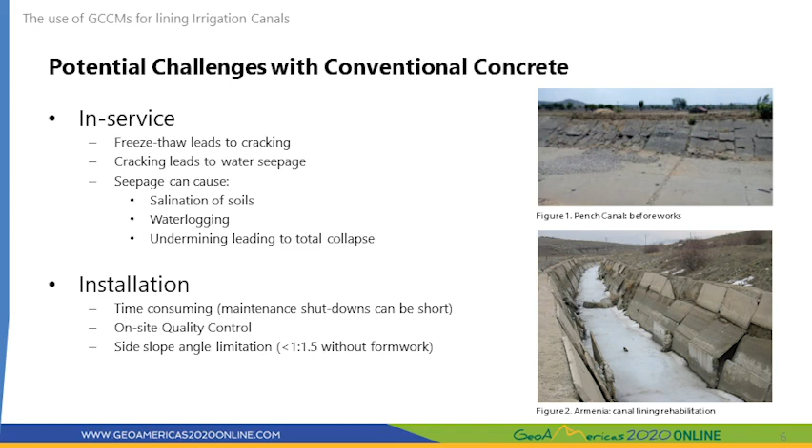And finally, the nature of pouring concrete means that side slope angles are limited. Typically, slopes above 1 to 1.5 gradient require formwork, and this leads to additional installation time and cost.

So why is concrete still used for this application? As Giroud and Plusquellec point out, concrete linings remain the preferred method of lining canals because engineers and agencies are familiar with concrete linings. And for all its drawbacks, concrete does have its benefit. It's hard, it's durable, it's UV resistant, it can be easily maintained, it can be trafficked by cattle, and it's less prone to local theft or vandalism.

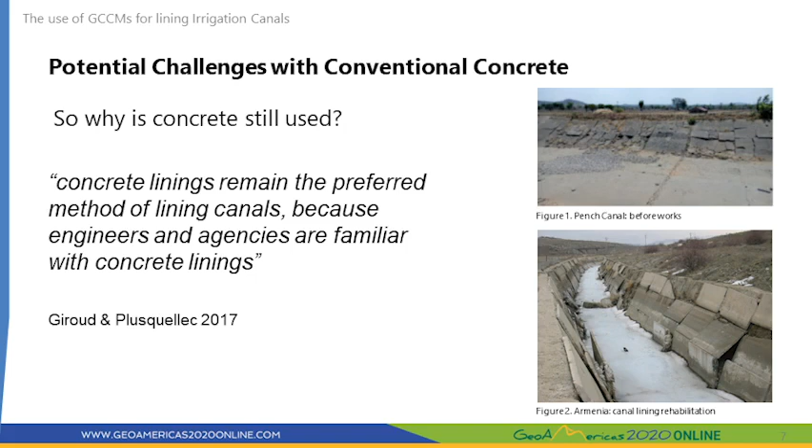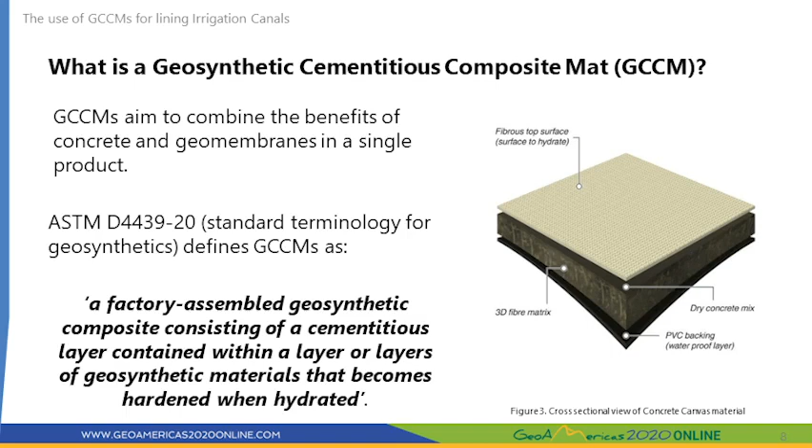So how do we combine the benefits of concrete with the speed and ease of installation of a geosynthetic product? That is the aim of this new class of geosynthetics. Defined within ASTM D4439, the GCCM is a factory-assembled geosynthetic composite consisting of a cementitious layer contained within a layer or layers of geosynthetic materials that becomes hardened when hydrated.

The most common GCCM is called concrete canvas, and it consists of a fibrous polyester top surface overlaying a reinforced fibre matrix embedded within a high early strength dry concrete mix with a water impermeable PVC coating on the rear surface.

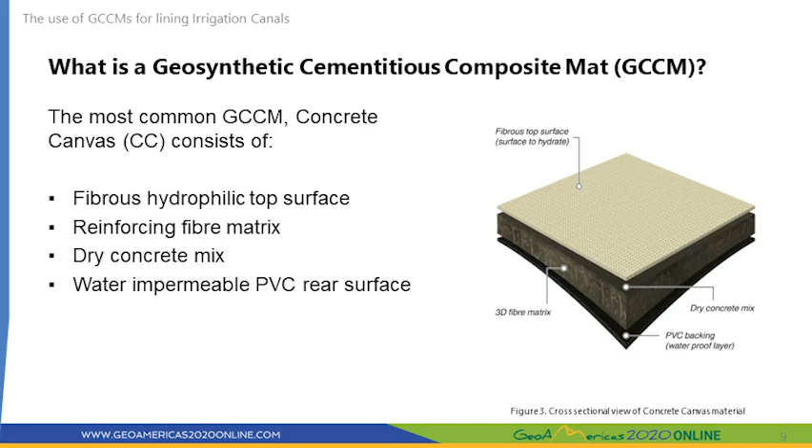GCCMs are supplied in roll format and they're laid over the soil structure that they're designed to protect. Once in place, fixed and jointed, they can then be hydrated, typically by spraying with water. The concrete then sets hard and typically is ready to use within 24 hours, providing a water-impermeable membrane overlain with a protective fibre-reinforced concrete covering.

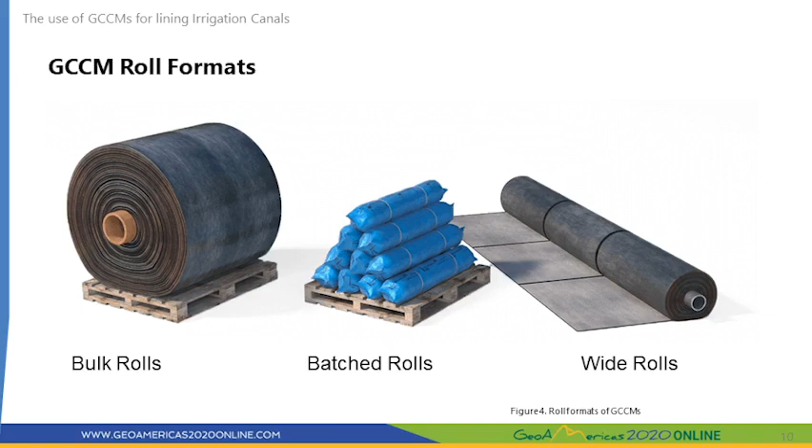Roll formats vary from bulk rolls, which are typically 1 metre wide and up to 200 metres long, to man-portable rolls, to wide rolls, which come in a multiple of the standard roll width. Typical applications include lining water channels, protecting slopes from erosion, lining culverts, and resurfacing old concrete structures such as channels or lining reservoirs.

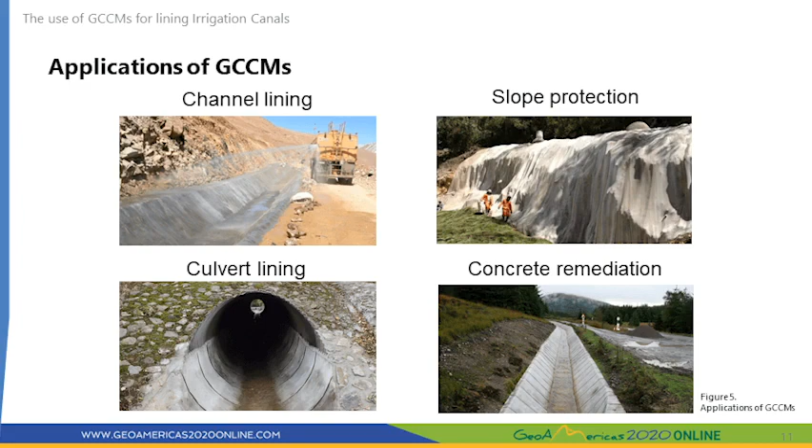One of the key properties of GCCMs is their ability to accommodate high levels of ground deformation while continuing to provide impermeability and effective erosion control. This is due to the composite nature of the product, where the fibre reinforcement initiates microcracking within the concrete. This allows relatively high strains to be achieved with minimal cracking within the concrete itself.

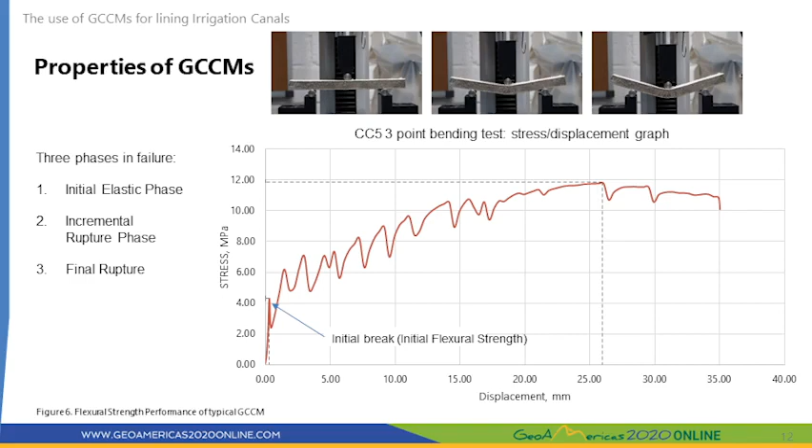I'd now like to move on and look at a real-world application of canal lining using GCCMs in the La Serena region of Chile. This is a project over two phases, with the first phase starting in 2016, which, based on its success, led to a second phase completed at the start of 2018.

So what was the problem? Well, the existing Bella Vista Canal was cut into soil and rock, as you can see on the right-hand photo, and unsurprisingly was suffering from high levels of water loss, reducing the water supply available to the local community. There were 5 sections of canal identified for improvement, all in difficult to access locations.

Another key challenge on this project was that they could only cut off the water supply for a period of 8 days at a time, and this was only possible over a short period during the winter months. Otherwise, there was a risk of damaging the water supply and crop failure to the local community.

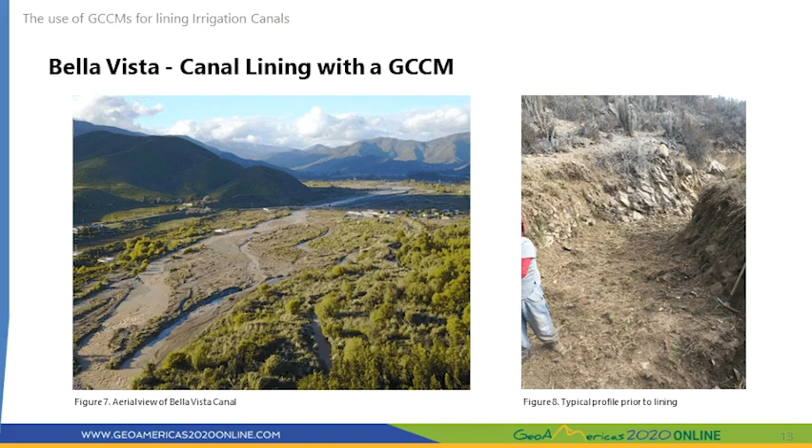The solution selected was a 5mm GCCM manufactured by Concrete Canvas called CC5. The selection was based on the speed of installation compared to conventional concrete linings and the ability for it to be transported to sites where access was limited. It was also felt that it was more durable and there was lower risk of theft and vandalism compared to geomembrane solutions.

You can see from the photo here that it was applied in man-portable rolls, cut down in lengths to suit the dimensions of the profile.

This first phase of the project was completed in only 5 days by a team of 6 people, covering 600 square meters. This included the ground preparation, which involved substantial reprofiling of the canal, as well as the laying of material.

Based on the success of this first phase, it was then decided to go ahead with a much more substantial second phase, covering a further 2.4 kilometers. You can see just before I move on the images before and after installation.

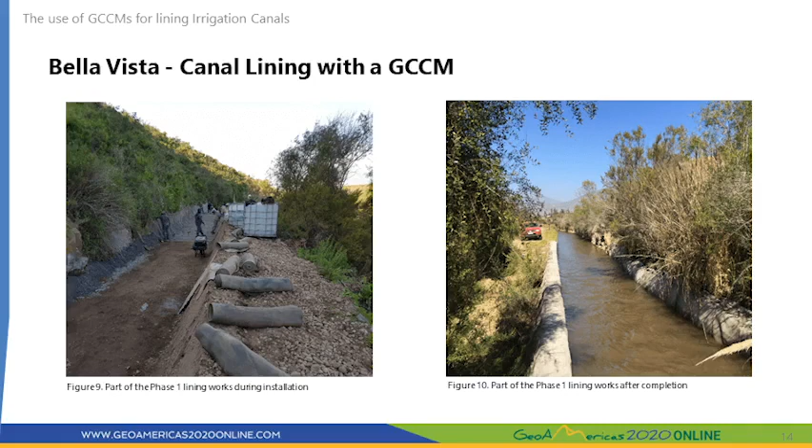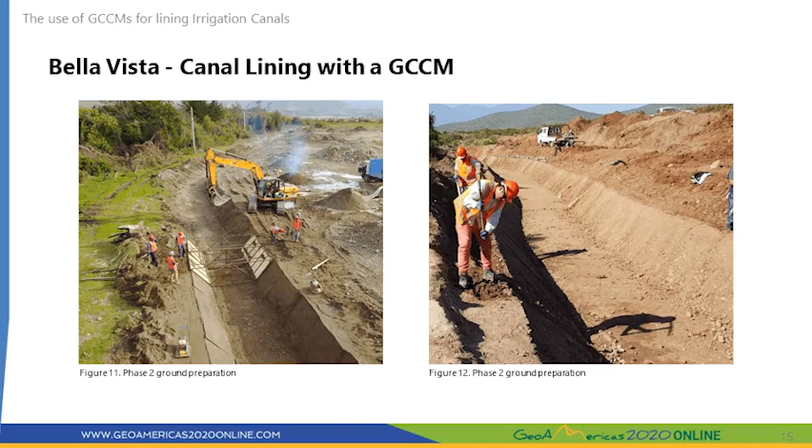For this second phase, a more uniformly graded profile was required, and so a new method of ground preparation was used. This involved using a trapezoidal former to create a precise channel profile, and by compacting stabilized material behind the former, this allowed the canal fall and the profile to be precisely controlled.

This profile was then overlain with the CC5 GCCM material, laid transversely across the channel. On this second phase of the project, access was better, so the material was delivered to site in bulk rolls. These were loaded onto spreader beams and deployed by hanging the spreader beam from the available excavators on site.

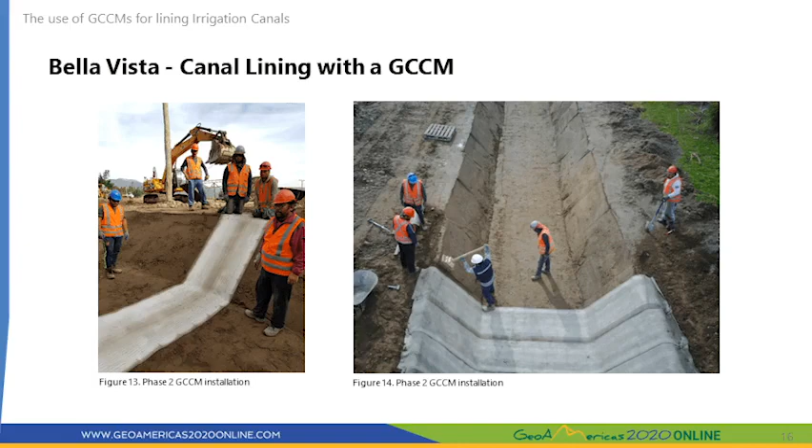Once laid, the edges of the GCCM were fixed into anchor trenches using ground pegs, and subsequent layers of GCCM were overlapped by 100 millimeters, shingled in the direction of water flow, with joints secured using screws and a polyurethane sealant. Where the GCCM interfaced with existing infrastructure, such as head walls, the material was secured using concrete screws and anchor bolts, and where necessary, sealed with an adhesive sealant to reduce ingress.

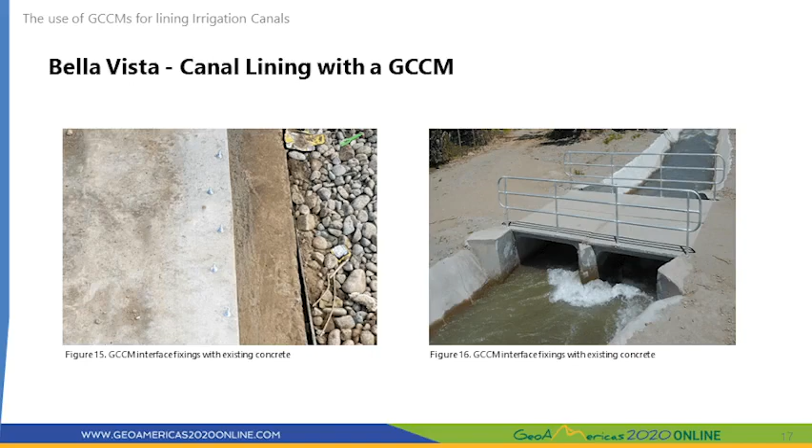I'd now like to show you a short video which I think demonstrates the application process much more effectively than just the images.

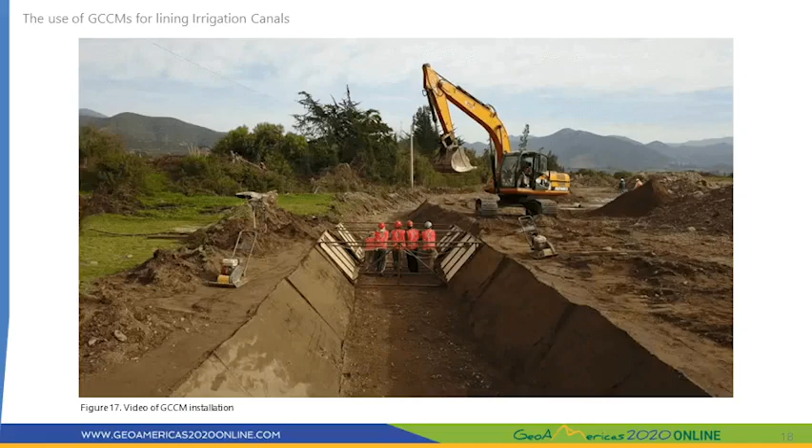You can see here the trapezoidal formwork being moved along and the GCCM material being unrolled transversely into the channels.

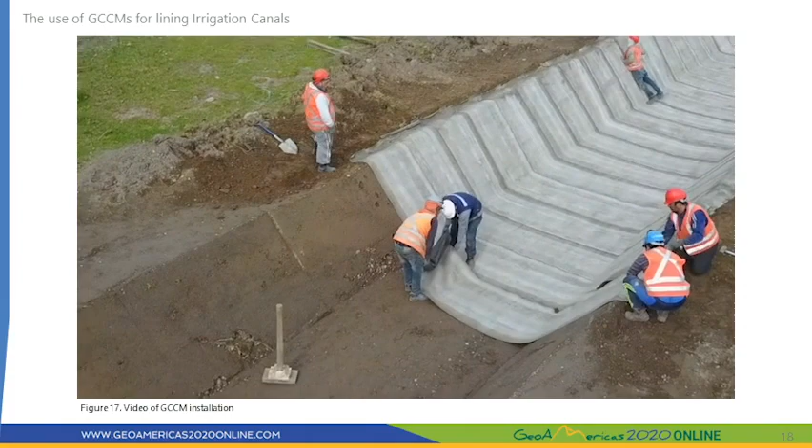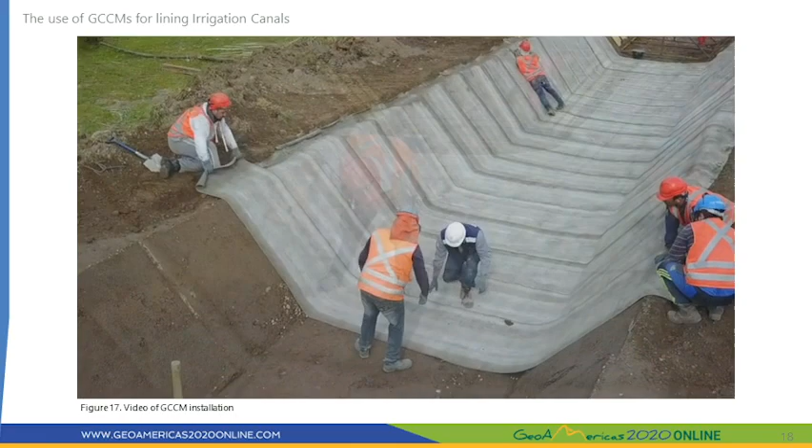Due to the logistical challenges of only being able to work for 8 days at a time on this project, a team of anywhere up to 70 installers worked on the project at any one time, working along the 2.4 kilometre channel in sections. In total, they had 3 of those trapezoidal formworks, 11 backhoes, and 3 20-ton excavators, as well as spreader beams on site.

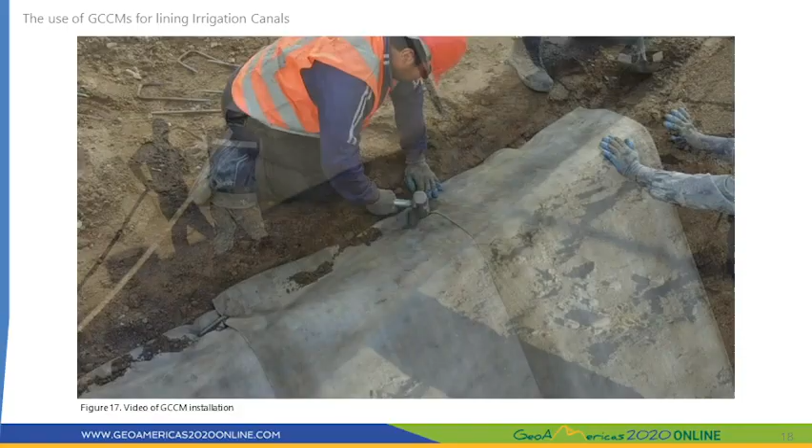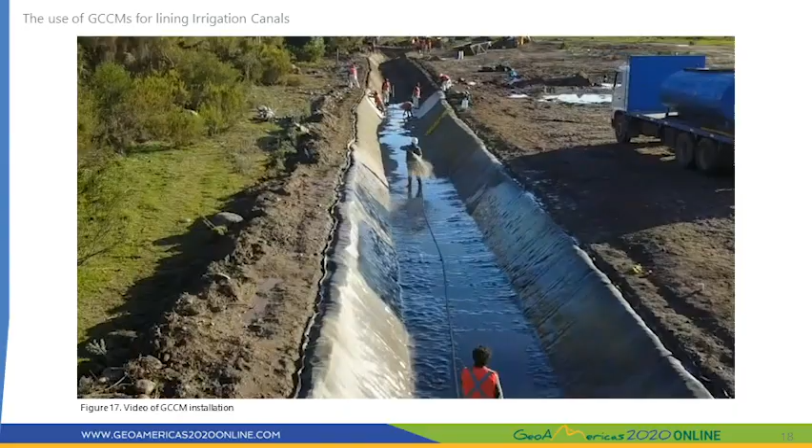So while one team worked on regrading and preparing the substrate, another team was laying material further down a section of the canal that the preparation team had just completed, and so forth. This allowed the installation to progress at a much quicker rate than it would otherwise.

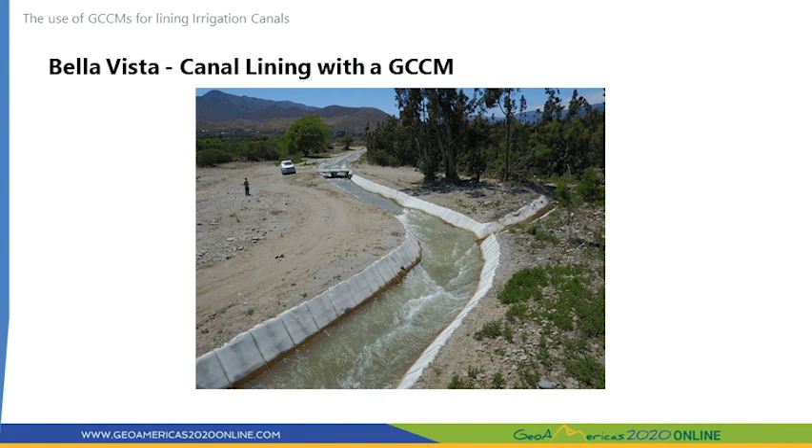Using this method, a total of 18,000 square meters of CC5 GCCM was installed over 40 days, with the team working around 9 hours each day. As a result of the project's success, the client subsequently specified Concrete Canvas GCCM for another similar project.

Just before I conclude my presentation, I'd like to look to the future. One of the limitations with GCCMs is that although they have a fully impermeable backing film, they still rely on mechanical methods of jointing, such as sealants and screws.

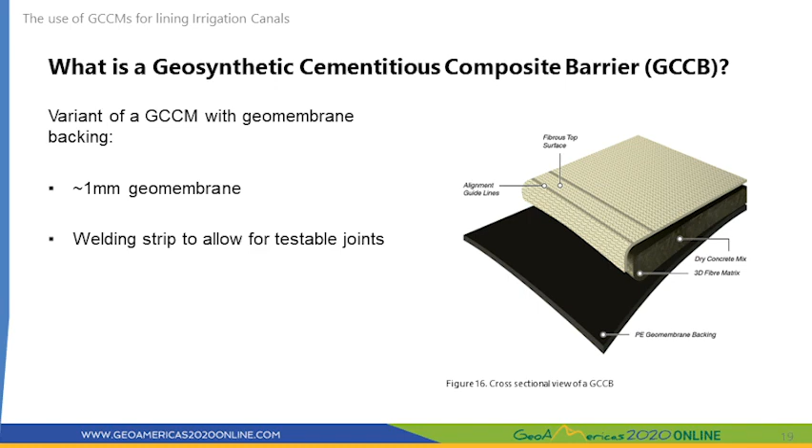There is now a new variant that aims to address this issue, called a GCCB, a geosynthetic cementitious composite barrier. This consists of a GCCM with an additional 1 mm geomembrane laminated onto the rear surface. This now allows for a fully testable, thermally weldable joint, providing a solution with the same impermeability as a welded geomembrane solution, but incorporating a protective concrete top surface.